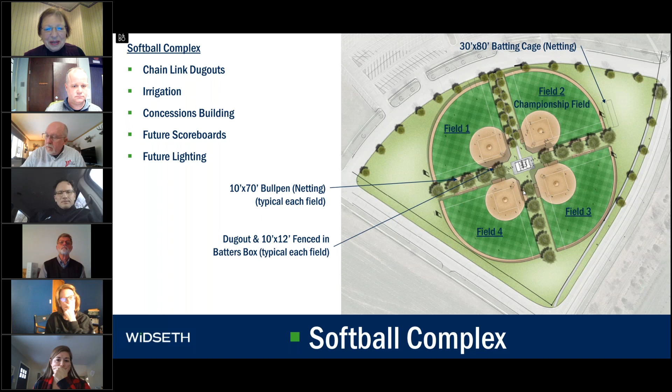What else makes the building minimal? That's a good question. Typically with this type of building, we'll use masonry construction on the exterior, an 8-inch burnished block, or sometimes a split-face block. It tends to be more durable and last longer, especially when you've got bats on the premises.

We scaled this back to a wood frame building with LP or cement board siding on the exterior. Generally we'll do a metal roof over the top for its length and durability, but this project we scaled that back to a shingled roof, and this was all budget driven.

Otherwise the rest of the building is pretty much the same. We use hollow metal frames and metal doors for security, and a roll-up door for the concessions building. That doesn't change — the interior of the concessions is pretty standard.

We'll have a sealed concrete floor with what's called a reinforced fiberglass panel on the interior. That's for both food-grade cleanability, and because we don't have heat in here, we don't want sheetrock joints, so it'll have seams that are allowed to move.

So basically, when I say we scaled this back, we've taken it from a masonry building to a wood frame building, and gone from a metal roof to a shingled roof. The building itself allows for storage, concessions, and restrooms. That was our goal, and that's what we tried to accomplish here.

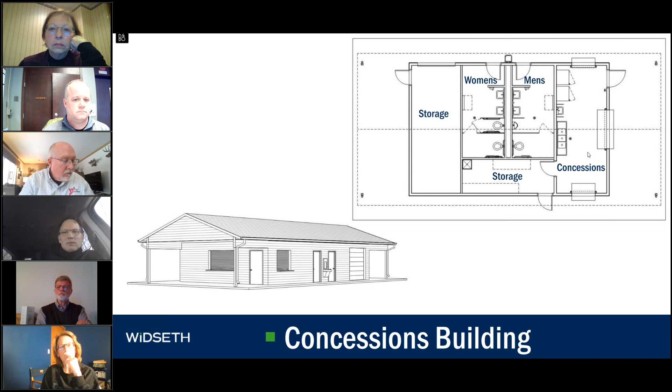Very well done. Are we still? Oh, I'm sorry, I forgot this last slide.

Looks fantastic. Any questions? Dennis has his hand up.

Thanks, Matt. I don't know if this question is best directed at John or Dana, but one of the things our group agreed upon when we were going to have this meeting was a little bit of a discussion about how well the proposed project met the ballot question. I'm wondering if you could run down there and tell us how we did versus the ballot.

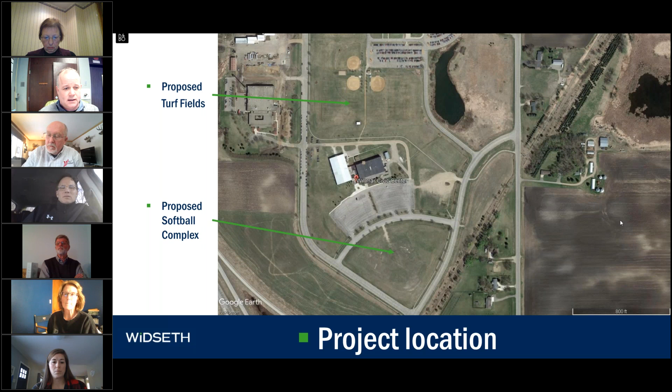I guess on the stormwater part, and Dana can probably speak better to it, but I think they have an alternate site for stormwater if that Lake Marley area is deemed a wetland, they have an alternate plan for the drainage. Is that correct, Dana? Yeah, that's correct.

And Chris, I think you alluded to this earlier, that this sort of reverse horseshoe box thing down here is basically your plan A, the lake, and this other retention pond is plan B. So you're envisioning a quick switch between the two depending on the end result, so we don't have any delays when we hear back from the Army Corps, is that correct? Well, that's the other option, shown on your plan there. That's correct.

As far as the Army Corps' timeline, when they do give approval, we'll have to see how that shakes out with shifting designs and repricing things, potentially having to update the permit with the city if we have to change from what we proposed.

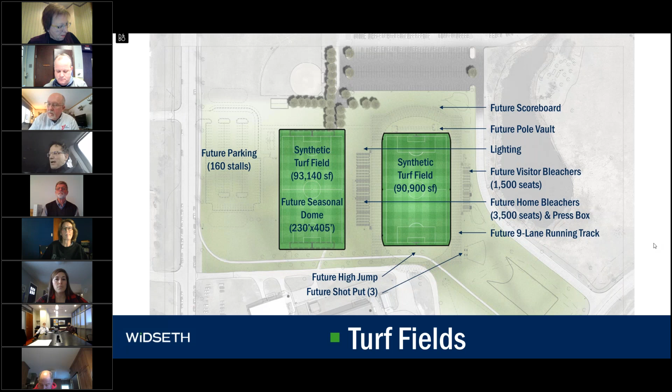So next up, item number 5 on the agenda, the event rec center update presented at 4:40. We're actually not too far off schedule. At this point, with just a little bit of history here, I am going to hand this off to Mary, and I'll sit back and have her take the meeting from here moving forward. Go ahead, Mary.

All right, thank you. So next up is the Events Center, Recreation Center update presentation. Gretchen, do you want to introduce, please?

Sure. I am not seeing Chris on yet, our representative from our architect LSE. Rob, is he? Yeah, he's here. I think it's under Randy. So Janelle, if you can make Randy the presenter. Oh, perfect, he's under a different name today. I think they might have two people with. So there we go, sounds good. But Chris, I see on that board now.

Great, so yes, we are so excited to be at this point where we can present our project to Invest in Willmar. We have worked hard on this and are really looking forward to getting it done. So I'm going to pass it off to Chris, who is our architect with LSE, and he'll walk us through the plans.

Thank you, Gretchen. Can everybody hear me okay? I think so. Great, well, thank you very much for having us on today. We're excited to show you a little bit more about the Willmar Rec Event Center. And...

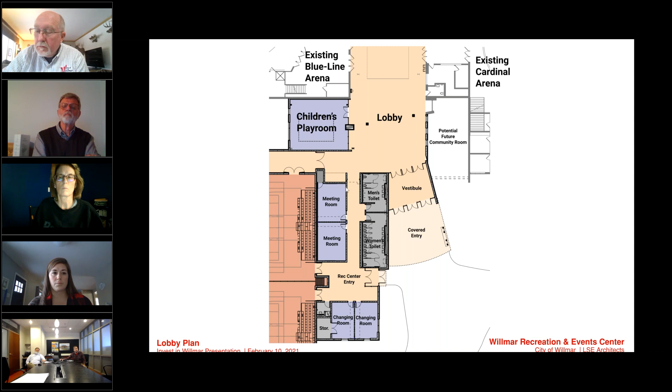Moving into the event and recreation space, it's a two-station gym. It will have gym, volleyball, tennis, and 4 pickleball courts on each side, for a total of 8 pickleball courts, 2 basketball, 2 volleyball, and 2 tennis courts. So it serves a lot of functions.

And there's the opportunity for you to have spectators, not just for a sporting event, but for concerts, for seminars that might go on, for large meetings that you want to take place with the community coming into the space.

From the back of house side, you'll be set up well for some of these larger events with the warming kitchen, which gives caterers the opportunity to come in, plug in what they need, and have space to set up, as well as a window, sinks, and counter space for a smaller community function to set up crock pots or anything needed for something more do-it-yourself.

And then what you'd expect to see - your storage, your receiving, your mechanical rooms, staff toilets - happen in the back of house.

Next, one of the functions that I think is really exciting for you is this event courtyard. Having this pre-function space allows you to set up and have, as well as it's even an area where you could display different artwork or tables, check-in, anything like that.

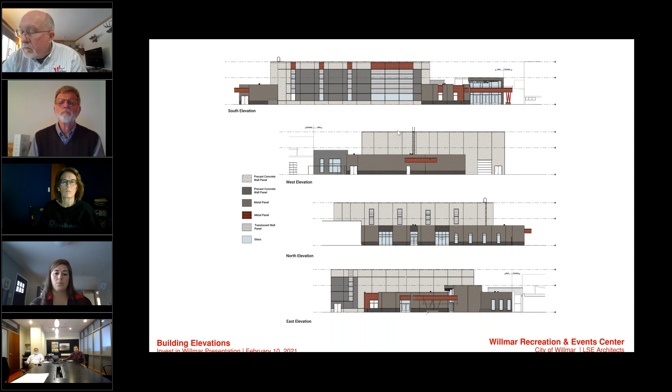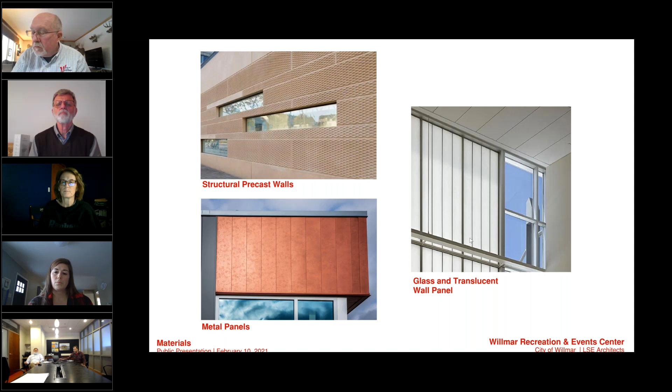These translucent wall panels have insulation between two sheets of plexiglass surface. All of this can be engineered specifically to the space so it doesn't let too much light in, but also throws the light further into the space, meaning that during daytime hours there are a lot of activities you can do in the gym without even turning on the lights. Also, the insulation means it has a much higher thermal value than glass would have, so you'll see a lower heating and cooling load than if that was all glass. We think it's a really great application for this project.

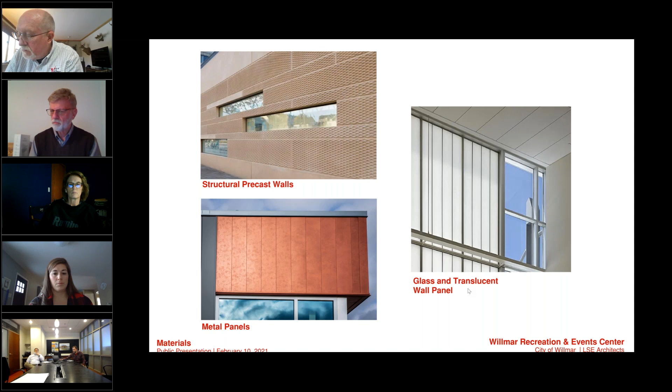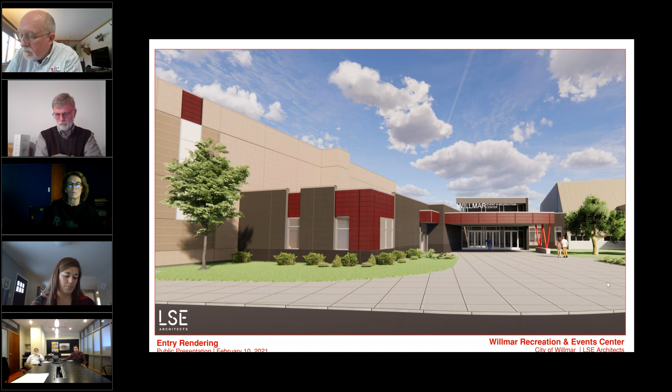We have a couple of renderings. This one's at the entry. You can see the two different shades of precast that we might be thinking, and areas where we're bringing in metal panel for color. And then, of course, really clear and concise signage, making sure the entry is well positioned so that no matter where you're parking in the lot, no matter where you're coming in, you know exactly where you're going. And then stepping back, seeing the building a little further back with the whole event center.

I think with this, we're opening the floor to any questions you may have.

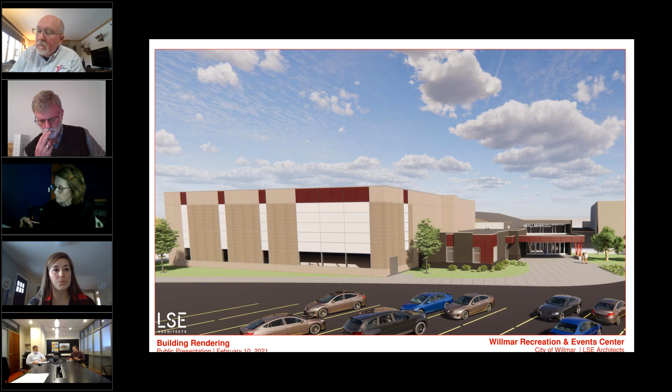Yeah, this is Bob Pohl. I've got a couple of questions. I'm wondering what the surface will be in the building, and what capacities would be, say, for a concert and capacity for a sit-down dinner event.

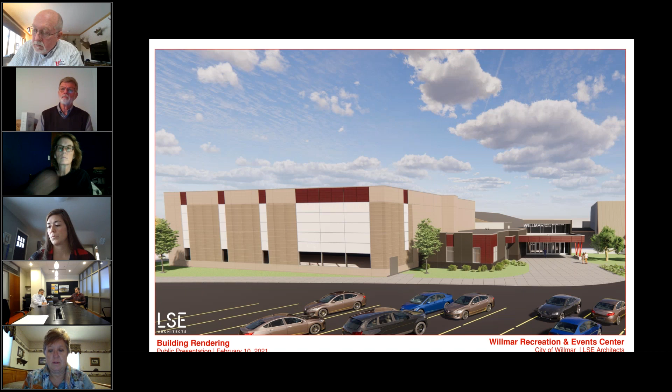Yeah, so first for the flooring, we're looking at in the rec and event center itself, it would be a poured rubber flooring. It's designed as a really resilient surface for sport, so bouncing a basketball, running on it, it functions really well. But it also holds up really well to putting tables and chairs or rolling things across it, so I think it'll function really well for the dual purpose this is serving.

In terms of capacity, from a fire code standpoint, we look at about 1,200. I apologize, I don't have it right in front of me - I believe it was, though, when you have tables and chairs, we're expecting it's closer to about 700 to 750 people.

Okay, thank you. Bob, if I can add, I went down to the cities with Jim Anderson, who represents the tennis community and the pickleball community, and we toured a flooring company that has this poured floor, to have him look at it and make sure it will work for tennis and pickleball, and it will. Okay, alright, thanks.

I see Dennis Anderson. Thank you, Mary. Could we go back and talk a little bit about the kitchen? I'm not sure I understand what capacity there will be in the kitchen to make meals, or we call it a warming kitchen. I need to understand how that functions.

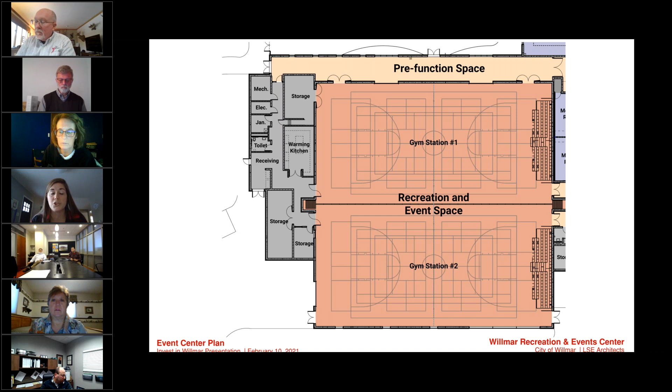The kitchen, which has been provided, the kids' play space, which has been provided, the outdoor covered skating rink, and the locker rooms would be the two items slated as future projects. And then for meeting spaces, we did provide a couple different options - we have the meeting rooms, and as he mentioned, the potential for that community room.

So Dennis, do you want to continue? I mean, the event courtyard was an add, apparently, and I don't know that it's very expensive, but can you give me a ballpark number, how much we're spending on the courtyard?

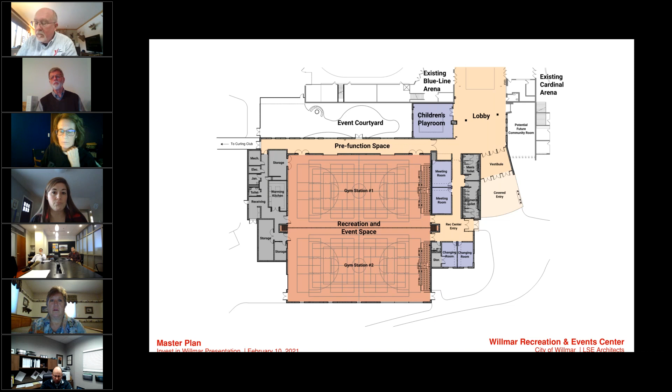I could speak to that. So the event courtyard itself - what we'd be spending on it really is the landscaping, which is budgeted for the entire project at about $25,000. Some of that landscaping isn't related to the courtyard, but I'd say probably two-thirds, so maybe 18 to 20,000, is for the event courtyard. The reason why there's a space there, and why we didn't push the building up into the existing Blue Line Arena, is the walls of the pre-function space and the gym space would have undermined the existing Blue Line's foundation. So we had to push the building south away from it, and the space was really left over, and we felt it was an amenity we could create there. If we were to eliminate the landscaping, that would save some money, but I wouldn't recommend pushing the building up.

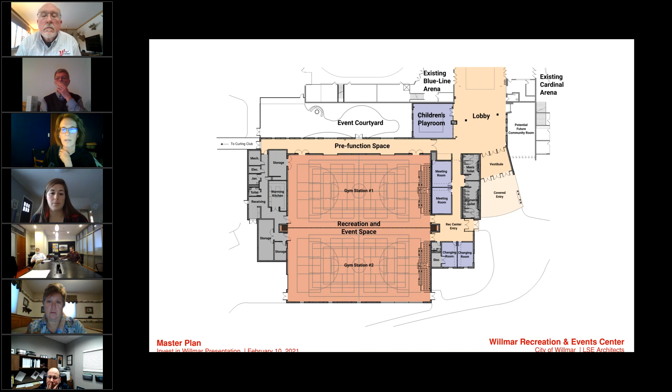Right now, we're intending that it would not be built at all, so we would leave that space empty. So can you then show me, as I enter the building, your nice rendering of what it looks like from the parking lot? Yes.

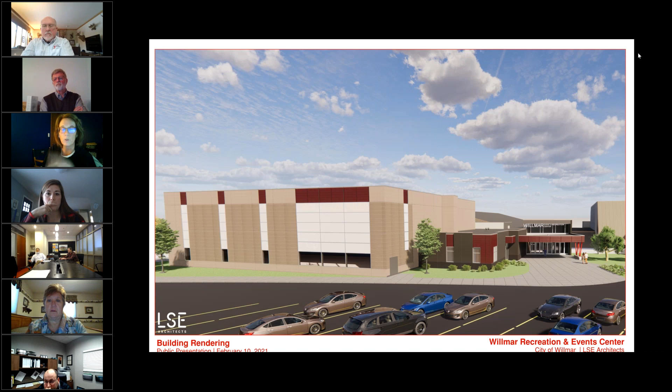So in this rendering, we actually do show the community room right there. I believe in the next one, I show it without, if I remember correctly. Okay, so where that tree is, is that the taller tree, is that the community room? Yeah, so kind of where that tree to the far right of the picture is. So what do you mean, will that tree be down, or have you already sketched it in behind that? That's the yeah, so the community room would be like here behind the tree.

So there. Oh, I'm on the left side. Okay, so it's to the right side, and it's not in your picture. Yeah, but that's where it potentially could be. Correct, and so that is the one piece that when it goes out to bid, we're going to be asking the contractors to provide a price to add that work, should you wish for it to be done.

So we have a list of, I believe it's 7 alternates, that one being the largest by far. A few of the others being the number of hoops that are in the gym, the bleachers. These are all ones that we expect that you're going to take. But the reason why they're alternates is our contract is written that we designed 97% of the price of the building, and we put the last 3% into alternates.

This is in case there is a huge spike in steel costs or groundwork or something that costs way more than has ever been estimated because of variability in bidding. You have the opportunity to move forward, assuming that you could choose to not take these alternates, but they fit within the 3%. The only one that doesn't fit completely within the 3% is that community room.

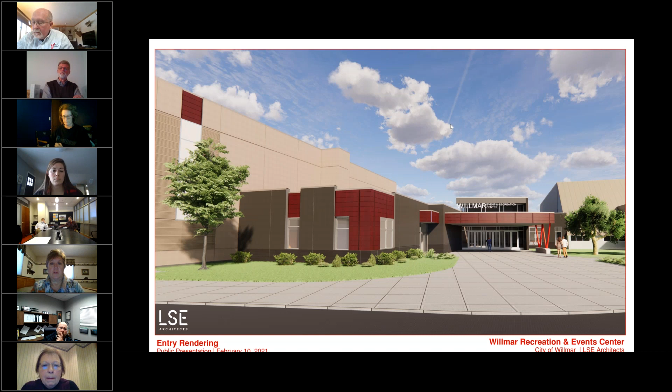Yeah, so you are correct, we are losing a little bit of parking in the parking lot. Sorry, let me get back here. So you have one more row currently that is coming out, so there is a slight loss. However, when we had done some of our calculations, we felt that you already had a slight excess for what the Civic Center has, and that you could afford to lose those. So we chose to not add additional parking into the project for additional cost.

Can I ask a question? Sorry, Audrey, are you finished with your questions? Yeah, I understand what he's saying, but I am concerned about parking because right now, when there are events out there, the parking lot is full. So if we're adding an additional 1,200 people, I'm just curious about that one. It still feels like we don't have adequate parking for all of the things that could be going on at one time.

Duly noted. Councilmember Osmus? I have 2 questions, and part of it I'm going to piggyback on Audrey. Is there the potential in the future to be able to add parking to the southwest there? Because there's a lot of green space there.

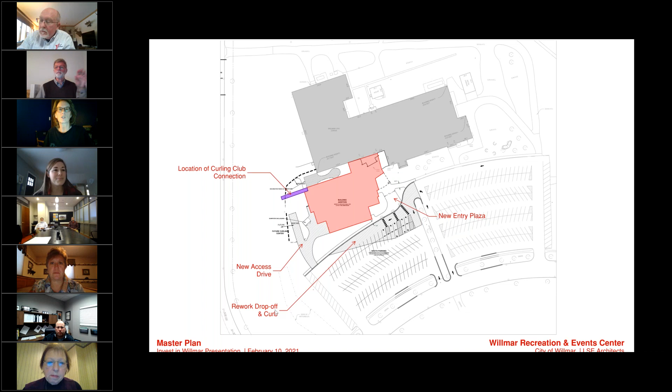Thank you. Good job with what you had to work with. I know you had to go round and round. Good job. Mary, are there any other questions? Dennis?

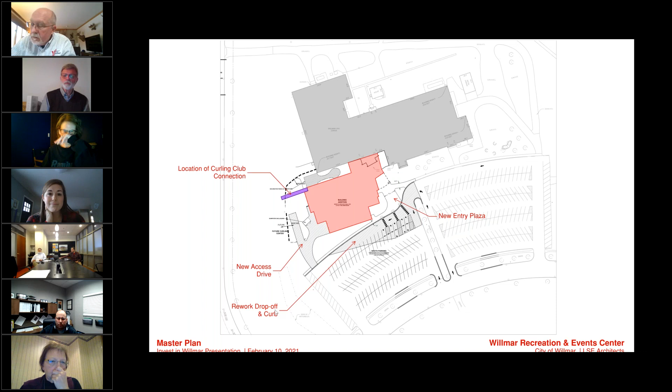Thanks, Mary. I want to go to the curlers just for a minute. I have some history with them going back probably 8 or 10 years. I think it was stated that you've been meeting with them. I'd like some assurance that the curling club is on board with this whole thing.

Yeah, we do feel really comfortable that they are. Gary Laughlin specifically is, of course, one of our subcommittee members, so he was definitely our liaison between the curling club and this project. And as they've shown in the picture here, we have fully considered where the curling facility is going to go. We absolutely want to make sure it is connected to the Rec and Event Center, that's going to make it the most useful all year round. I know Rob can definitely speak to the facility and operational part of it, but we do feel really confident that we've made this work exceptionally well for that future project.

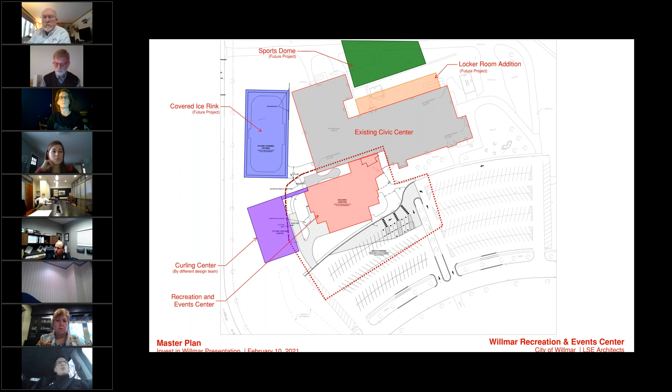So I love this, it's great, you guys did an awesome job. But I really believe we need to make sure that if we deliver this to the council, we know exactly what's going to be programmed out there. I know the city needs gym space, and in my opinion, I'd rather see 15,000 feet versus 25, or Julie says let's jump in here and try to make this a community center too. I don't know how we're going to do a 25,000 foot event center, a 20,000 foot community center, and a bubble. I mean, our committee really needs to say, are we really going to do all three of these? I'm for all of them, but if we're only going to do one or two, that's a legitimate question I'm interested in somebody answering, or the council's going to have to answer to a lot of people because they are going to get calls.

And then the other thing is, what are these big events in Kandiyohi County that we are going to bring in to fill 25,000 feet? Because I'm all for it, I'll be the first one to help market them. I just don't know what they're going to be.

And maybe they're out there. So those are just a few thoughts. I've got a lot of time and energy into this. I think it's fantastic. My point is, are we duplicating any of our services that we have in our community? I think everybody needs to think about that.

Could we do 15,000 feet here, do the outdoor rink, and fund the bubble? Could we do 15,000 feet for 5 million, do the outdoor rink covered, and the bubble, and put $1 million into both of those? I just want to reach as many people as we can. Somebody can convince me or the council that we're going to reach a whole bunch of people here, great. But there are soccer groups out there that voted for the bubble.

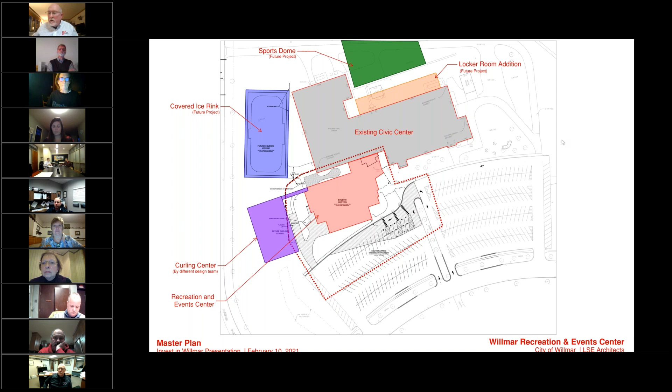Okay, you should have all received the sales tax receipts. Looks like the November numbers have come in. Let me get my papers here. It looks like we've got 188,000 for November 2020, and we've got our initial, well, 179,000 for December 2020, which is averaging about, I'm going to say, $180,000 a month. So to the extent that 250,000 was the projected number, we're at 180. Obviously that does put pressure on.

The quickie analysis I've been working on with Doug Green and Steve, as far as is there enough sales tax coming in to cover costs, and at this point in time, if we got the same sort of bond issue deal that we got for the 5 million we just sold, where we received $5 million but only have to pay 4.5 million back, kind of a thing, and that's kind of a nice deal. So if we continued doing that, we could pay for the recreation fields.